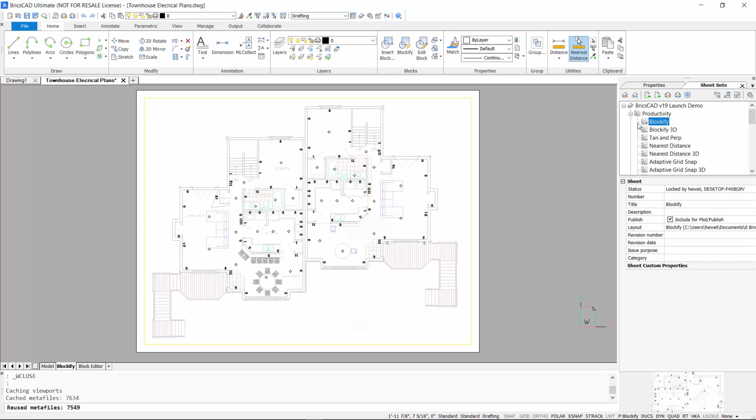Blockify tool and block editor in BricsCAD make it easier than ever to create and edit block definitions. Blockify automatically converts repetitive sets of entities to block definitions. This electrical plan includes many receptacle, switch, and light symbols, but they're not blocks. Either the blocks were previously exploded, or someone simply created the entities and copied them many times.

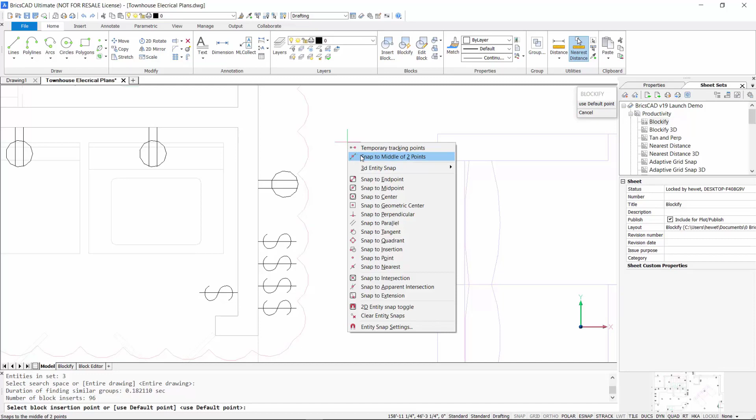Regardless, it increases the size of the drawing, prevents accurate data extraction, and can lead to inadvertent editing of individual entities. It's sloppy drawing practice and should be cleaned up. With Blockify, you simply select the set of entities you want to turn into a block and the set of entities or the entire drawing for BricsCAD to search for matching sets.

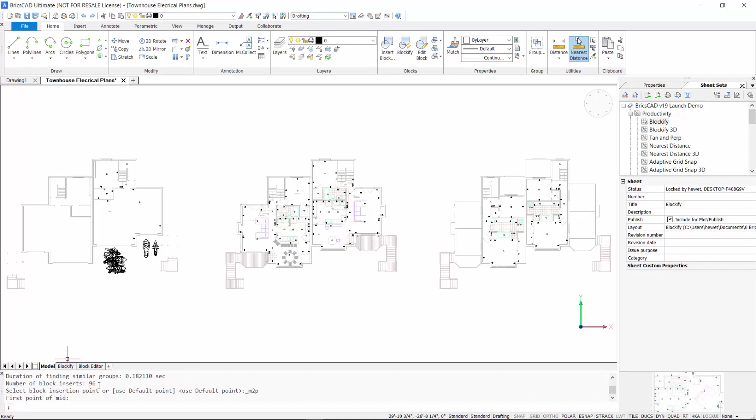BricsCAD automatically creates a block definition and replaces all matching sets of entities with block references. Within a fraction of a second, BricsCAD turns all 96 sets of these entities into blocks. The Blockify tool is as powerful as it is simple, like an incredible magic trick that you know can't possibly be true. But Blockify is real and possibly the best CAD productivity tool in decades.

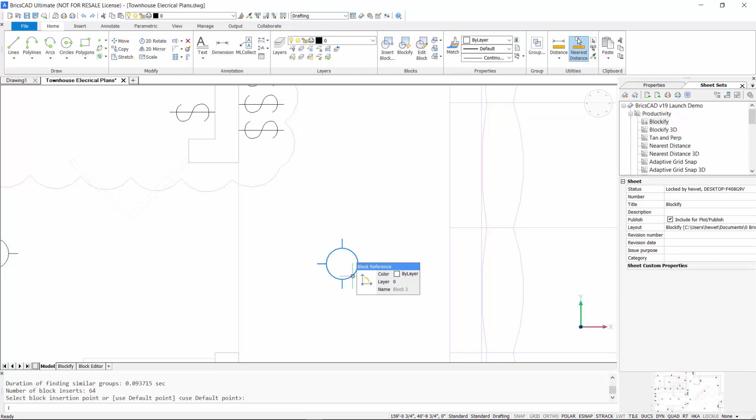After repeating Blockify for both the switch and light symbols, we've converted more than 700 circles, lines, and polylines into 3 block definitions with more than 200 insertions, all in a matter of seconds. Imagine how long that would take you without the magic of Blockify.

With all those entities converted to blocks, you can then select and modify them just like any other block insert. For example, use the Select Similar tool to quickly select each type of block and then change them to the appropriate layer. And, of course, you can rename the block definitions to something more appropriate.

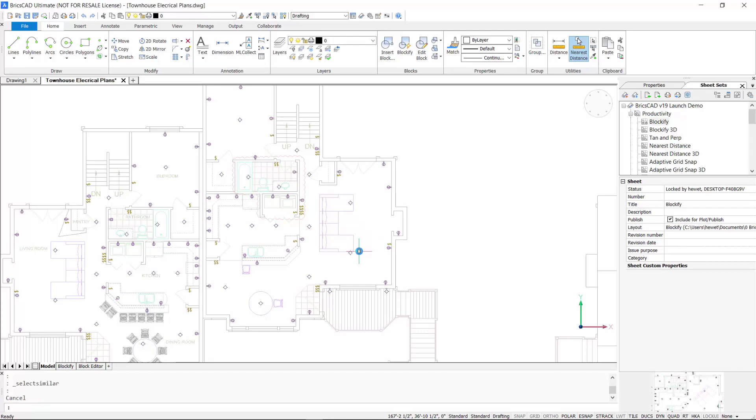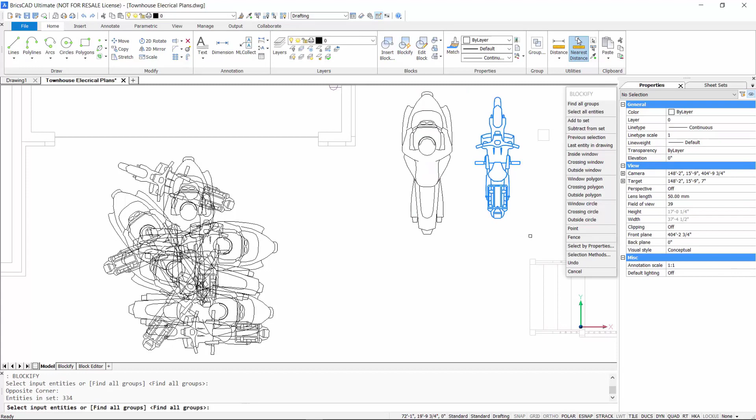If you're still not a believer in the magic of Blockify, here's a more complicated example. These are just a bunch of lines and arcs which have been copied and rotated 5 times each. Almost 3,000 of these individual entities are piled on top of each other. Blockify is intelligent enough to detect matching entities even when they overlap with geometry. Behold the magic! Using Blockify for each set of motorcycle geometry accurately converts the pile of motorcycles into 10 block references.

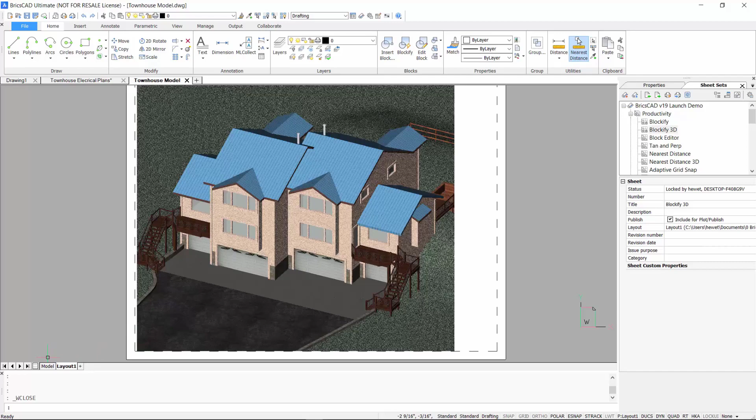The powerful Blockify tool isn't limited to 2D geometry. It works just as well with 3D models, even in cases you may not expect. This model of a duplex home is quite large, but even with materials applied, the performance in BricsCAD is great. As I zoom and pan quickly, there's no visual degradation.

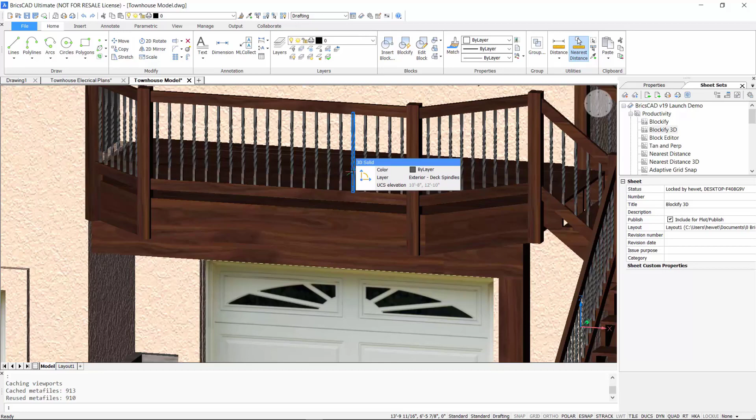Because performance is good and my time is valuable, I didn't bother creating block definitions for most of the repetitive geometry, not even for these deck spindles, of which there are many. But still, using block definitions for multiple instances is good practice. And since this is a duplex, which I modeled by creating one unit and then mirroring it, there are at least 2 instances of nearly every entity.

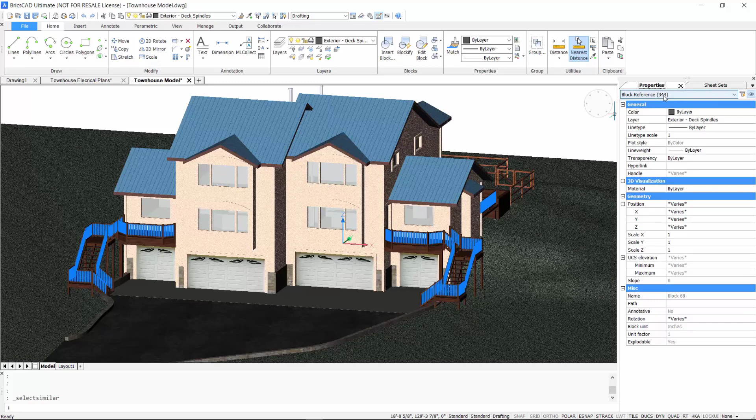Using Blockify and taking all the default options, BricsCAD automatically changes those spindles from more than 300 inefficient solid entities to a single block definition with more than 300 references. It creates block references for all identical solids that occur more than once in the drawing, significantly reducing the file size. If you want to edit these solids again in the future, you can always explode the block or use the block editor.